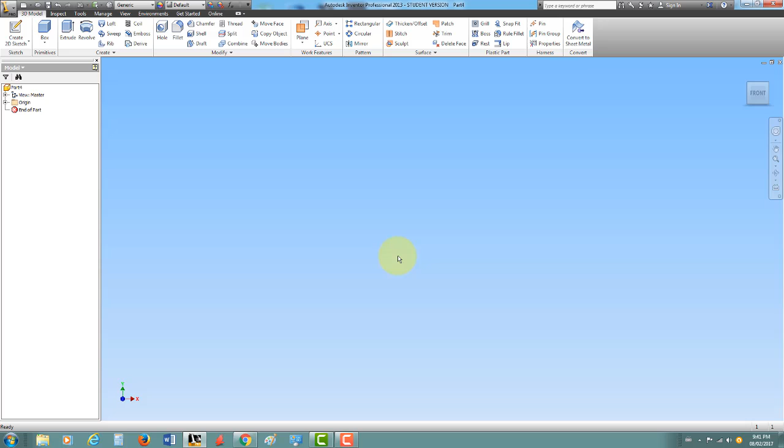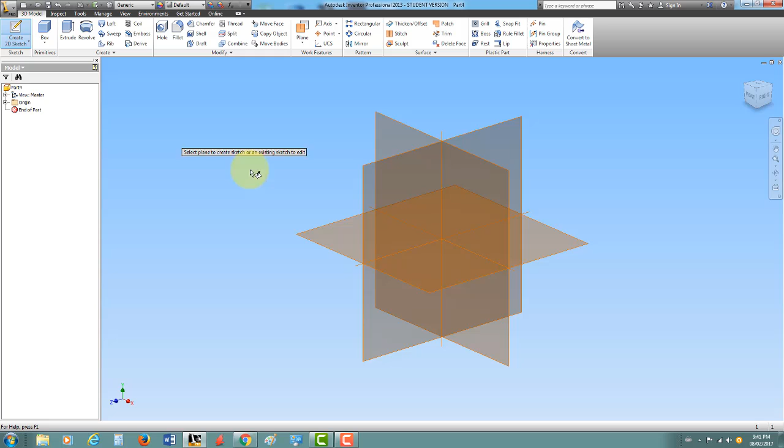Click on Create. Now it creates a 3D space in which we can design our 3D keychain. The first thing we're going to do is create a 2D sketch, and we need to do that in order to make something 3D. Inventor needs a 2D sketch to convert into a 3D object. So we click on Create 2D Sketch, and we're going to select this plane right here.

Now I want to load up my file, the image I just found on Google Images. So I'm going to move my mouse up to, as you can see, Insert, Image. And then I'm going to choose my Spider-Man logo to insert into there.

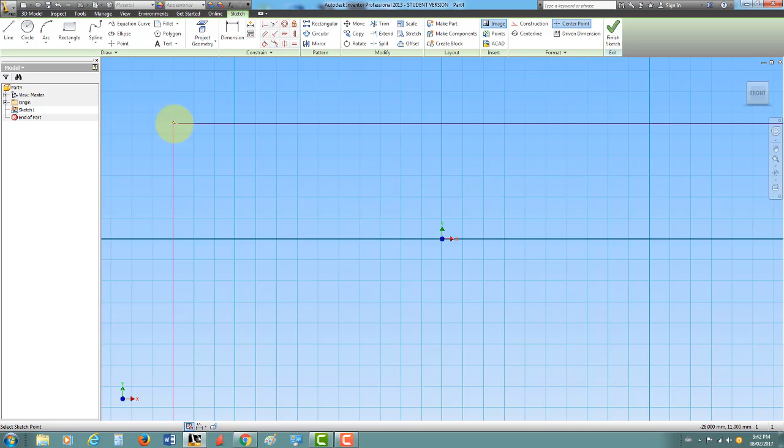And you'll notice that it's going to be really big. And so Inventor's got a cool feature. We all have a mouse wheel. So all you got to do is roll your mouse wheel up or down, and you'll notice that it zooms in or out.

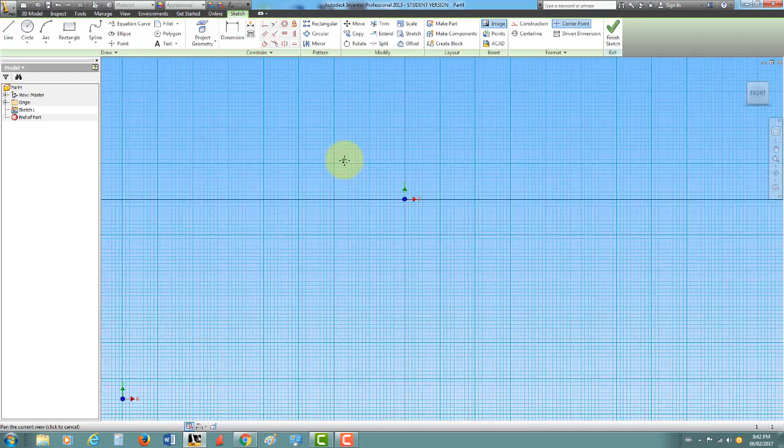The next thing is, you see how we've got this X and Y, these two thick lines and a center? Well, I want to move it so it's actually in the middle. So with that same mouse wheel, I'm going to click with the mouse wheel, and you see a little hand appear, and I'm going to drag. Click, and remember, that's clicking with the mouse wheel. I'll click and place that there. I only want to place it once, and I'm going to hit Escape.

The next thing I'm going to do is dimension this thing, which means I want to set the size of it. Your keychains are going to be very specific in their sizing. And so to make my life a little bit easier, we're going to make sure that our keychains are 70 millimeters across. So that's 7 centimeters.

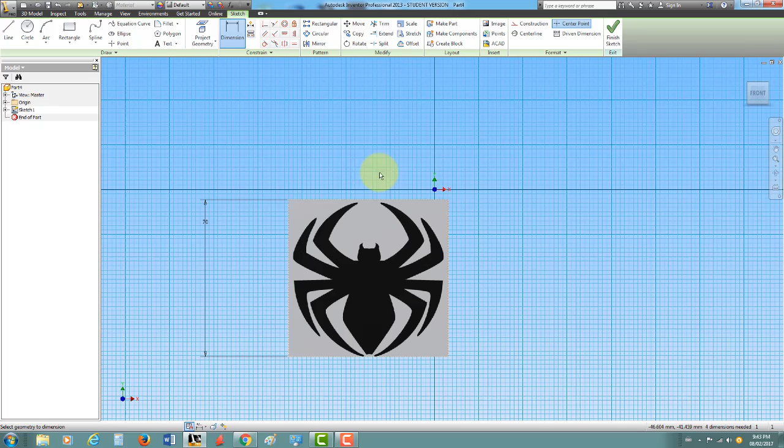So click on dimension. I'm going to choose one side. It does matter. You want to choose the longest side. If it's a square picture, it doesn't matter. If you've got a rectangular picture, you want to choose the longest side, click on it, and change this number to 70 mm and hit enter. It's going to make it a little bit smaller, but that's totally fine. And so now when you make your sketch, it'll be 70 millimeters at most from end to end.

If the picture is white except for a small image in the middle, then talk to me and I'll walk you through what to do in that situation. So you might need to edit the image. So I'm going to click on Finish Sketch, and now I've got my image inserted.

Now I'm going to start another sketch, but first I'm going to name this sketch right here. You see over here it says Sketch 1. I'm going to right click on it. There used to be a rename function, so we might have to do this the old-fashioned way, which is I'm going to click once on it until I see this box open up, hit the delete key, and I'm going to type in image. And that means that my image is on that sketch.

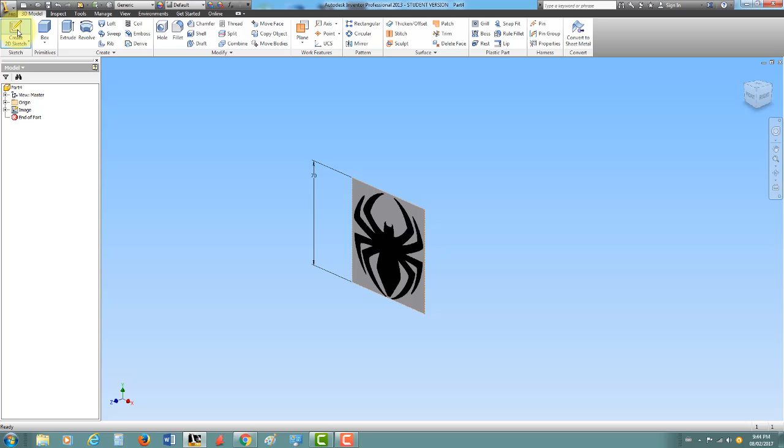I'm going to make another one. Click on Create 2D Sketch. I'm going to click on the very same plane. And now I'm going to zoom in on this, and I'm going to start drawing my lines and tracing this out. Now there's a bunch of tools like arc and circle and spline. What I've found is the easiest thing to do in Inventor is to use the line tool, even for curves, and I'm going to show you how you can do that.

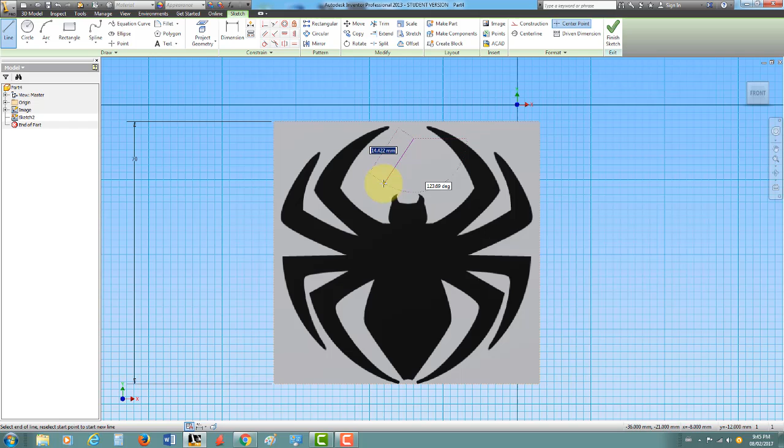So I'm going to click on line, and I'll show you this quickly, even though I can do lines like that, they're all angled. The interesting part is when you draw lines really close together and change them just a little bit, you can create something that looks like a curve that's really a bunch of differently angled lines. So I'm going to click on line again. I'm going to zoom in, and I'm going to choose a spot to start.

Now, some of you might notice you can't quite get your mouse where you want it to go. And that's because there's this function called grid snap that's selected. So if you notice it's doing this weird jumpy thing, move your mouse down here, and you'll see this little magnet with a grid, and it says snap to grid. I'm going to click on that to get rid of it, and look, now I can move it freely.

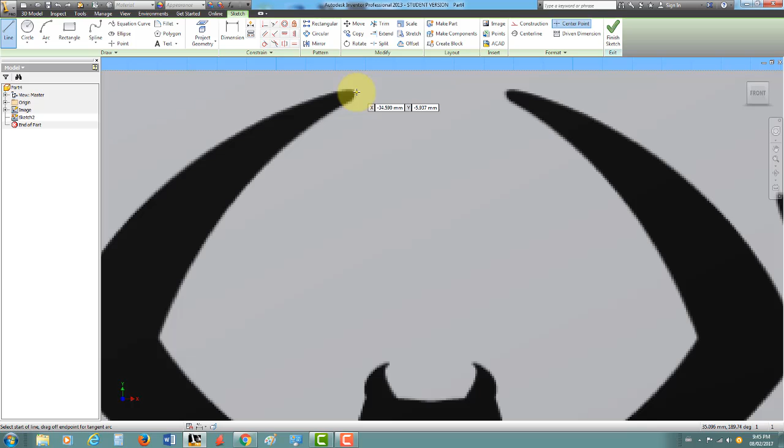So I'm going to start drawing here, and I'm going to zoom in. And if you notice it's kind of getting stuck, like it says so many degrees, just zoom in, draw it in, and just start tracing. You can zoom out, and you can use that middle click to move it over.

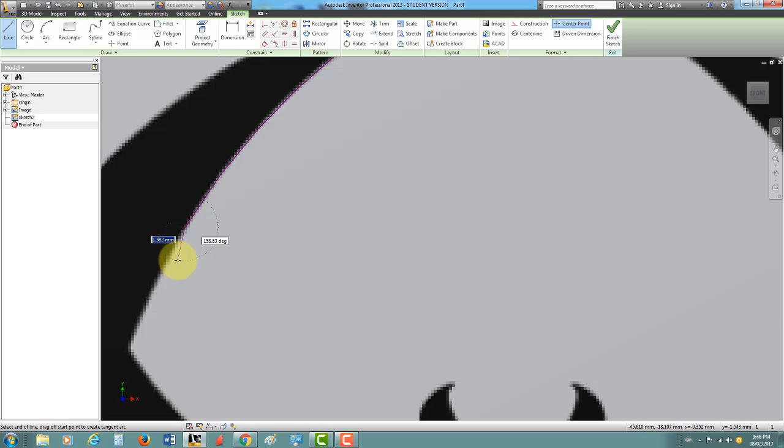And you'll notice what I'm doing is I'm just following the sketch. I'm not doing anything fancy. I'm just drawing a bunch of straight lines, and at some point when the line can no longer trace it, I just stop and click once. Every single time I change the type of line, I just click. In this case I maybe want a little bit finer. Click, click, click, and so on. So let me just finish this up.

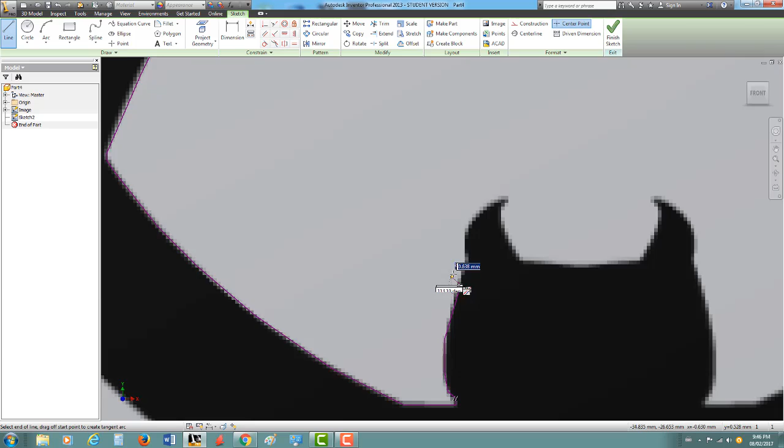We're going to go in fast forward mode right now. So I'm going to stop drawing right here, somewhere in the middle, just where I thought the middle of this drawing was. I'm going to move my mouse here, and you'll notice that in order to stop drawing, I've hit the escape button, and it automatically stopped drawing lines.

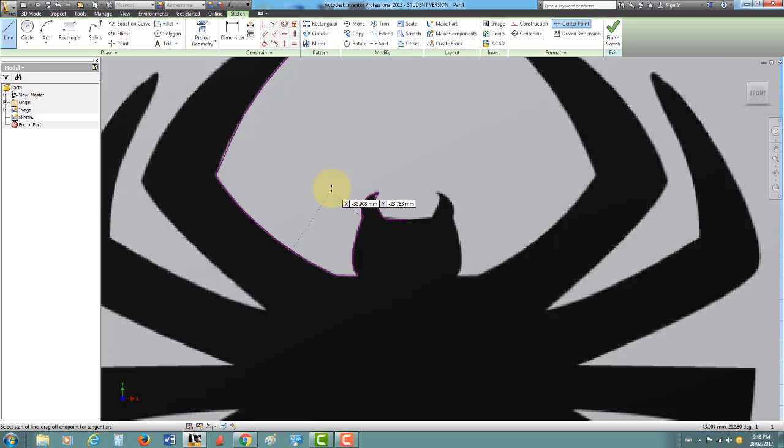Now if I want to continue drawing, let's say I made a mistake there, I can move my mouse up here to the undo button and click undo, and it'll undo any lines I did. If I go too far, I can click redo. So this button right here is undo, and this is redo. If you make a mistake, like going back too far and not wanting that many lines removed, you can just go forward. That's a way of undoing.

Another trick is if you want to delete a line, you can click on it and then right click and choose delete, or - I'm going to undo that - I can click on it and just hit the delete button. So both work, and in some cases one will work but the other won't. So I actually want that line.

Now let's say you accidentally drew a bad line, hit escape, undid it, and want to continue drawing. You just got to take your mouse and move it back until you see a green dot appear. See that green dot? That tells you that you're starting right where you stopped. It's snapping to the corner of the last line you worked on. So the green dot's your friend.

Now the reason I stopped here is because I'm going to do a trick for symmetric drawings, which means the left half is the same as the right half. I'm going to start by drawing a line straight down the middle, and you'll notice it'll automatically guide your straight line. It doesn't have to connect to the bottom, it just has to go straight down. Then hit the escape button.

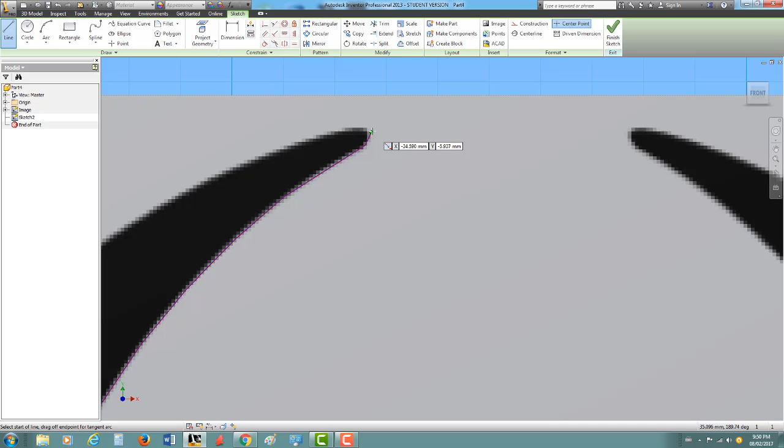The click you heard was me hitting the escape button. I'm going to then trace only this side, until I reach here. So once again, we're going to zoom in on where I last started my drawing, and put this in fast forward mode while I trace this out.

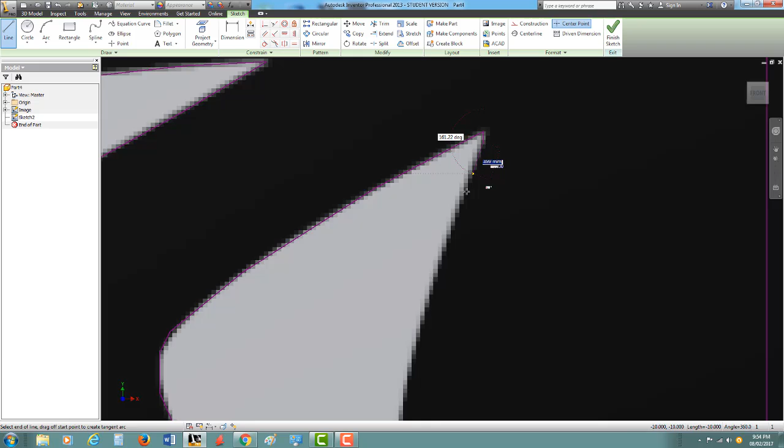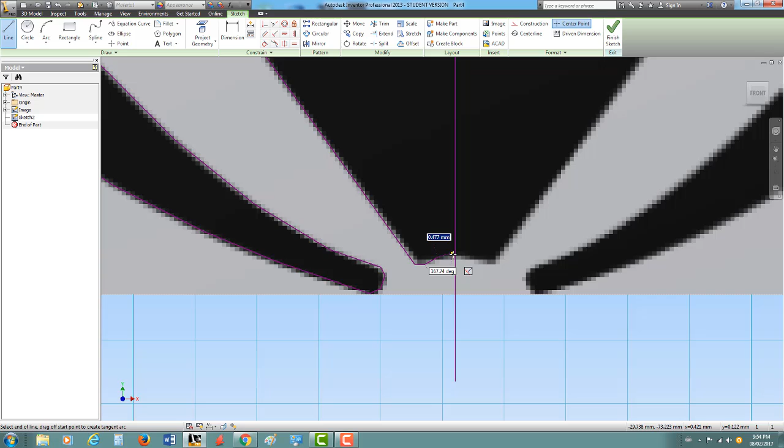Okay, now we're almost done drawing this part right here. So now I've reached the ending, and you're probably wondering how do I know if I've reached the end? Well, if I zoom in, you'll notice that as I move it, all of a sudden it jumps right onto the line. You see how it's on the line? I'm going to make sure that it's actually on the line by going a little bit further past it, and then I'm going to hit the escape button.

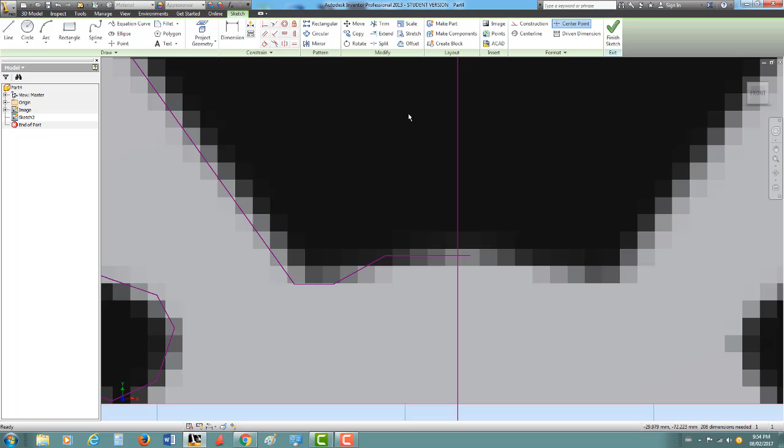And then I'm going to use what's called the trim function, which will get rid of any extra lines. Now, Inventor is very weird - it doesn't like any gaps. So for example, I'm actually going to just delete this. I'm going to show you what I mean - Inventor does not like gaps.

Right now what it wants is what's called a closed shape. So if I start over here and follow the line all the way around, and get down to here, I need to be able to go back to where I started. That's what Inventor wants - it says if I follow the line all the way around, I should be able to get back to where I started.

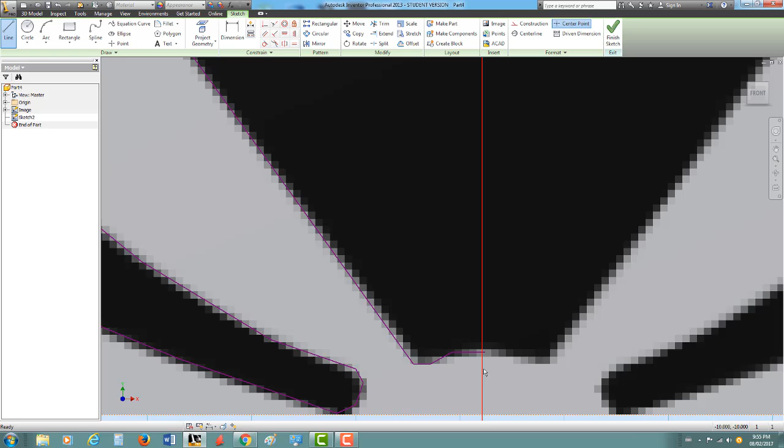You'll notice what happens is I can't. I'll stop here and I have to jump a gap. There's no line leading me there. So in order to do that, I've got to take this line and connect it to this guy right here. And now I can go all the way back around. In Inventor, as long as I've got a closed shape, it'll allow me to make it 3D.

I'll show you this just now. You don't have to do this, please don't do this, just watch this part. I'm going to show you why it matters.

So I'm going to click Finish Sketch. You're not going to click Finish Sketch, you're just going to watch the video. And I'm going to click on the Extrude function, which makes stuff 3D. You'll notice I can't make this 3D, it's just not letting me do it. So I'm going to click Cancel.

Here's a bit of a trick. Let's say I finished my sketch, and this is something you might find useful. Let's say class ends, or you're done working on this and you have to go do something else and want to come back to it. When you open up your file, you're going to see this. Don't just start a new sketch, you want to make sure you go back to your original sketch.

The reason being, think about it this way: if you're making a piece of art, you don't want to draw half of it on one page and half on another, unless you're trying to do some postmodern thing. You want to make sure your sketches are on the same page, so when I look at that one page, I see your full artwork. That's why you have to go back to your original sketch.

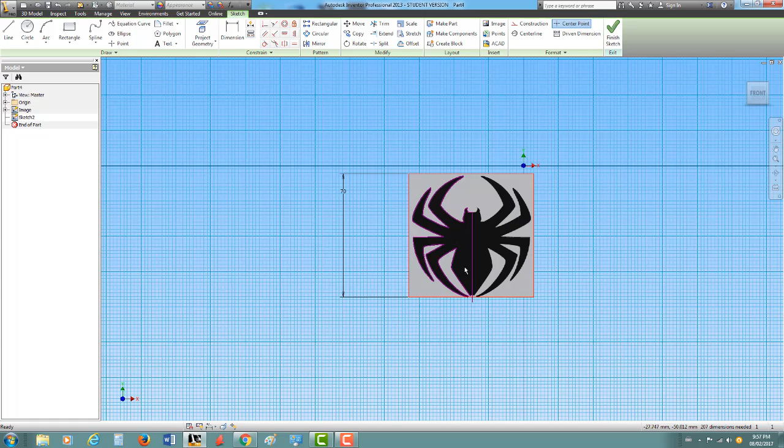So I'm going to double click on the one I was working on. If I move my mouse away and then onto it, it highlights what was last drawn, or what's on there. If I put it here, it'll highlight the image, so image is highlighted, drawing is highlighted. I'm going to double click on the drawing part, and I can go back and work on it where I left off.

The last thing I need to do is connect these lines, and boom. Now I'm going to finish off using something called a trim function, which I mentioned earlier before going off on a tangent. I'm going to click on trim, zoom in, and trim away this extra line I didn't need. Now you'll notice I've got this nice shape, but only half of it.

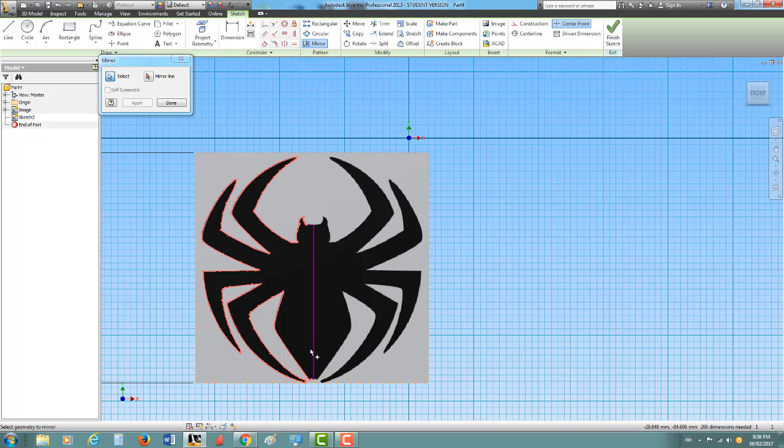So I'm going to use what's called a mirror function to make an exact copy but on the other side. I'm going to move my mouse up to where it says mirror, right above pattern, and draw a box around it, starting from the top corner. I'm trying to select everything but the line I drew that connects the top. So I click that, zoom out to make sure I zoomed in, and I also clicked on this guy right here.

But I'm not going to click on the center line, so I'll click everything but this line down the middle, because that's what's called my mirror line. Now that I've selected what I need, I'm going to click on mirror line, select the center line, and click apply. It's taken my drawing and copied it over pretty closely — not exact, because this line's not exactly in the center.

But it doesn't really matter, it's still going to look great. So I'm going to click on Done. I don't need this mirror line anymore, so I'll click on it and hit delete like we said before. Then I'm going to click Finish Sketch.

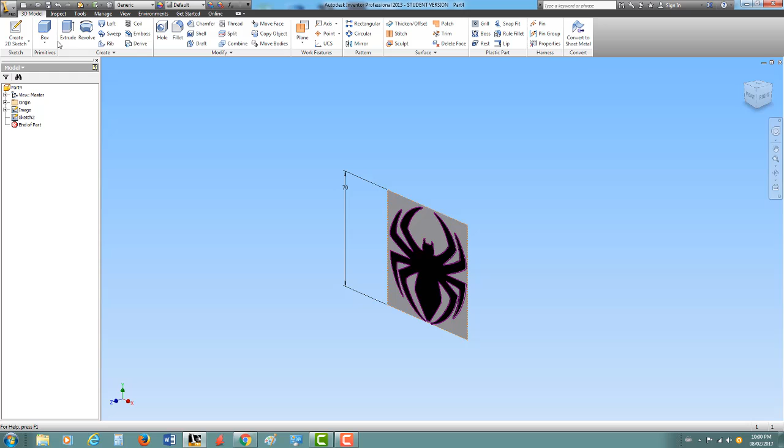Now if everything went well, this is a perfectly closed shape, which means I can go all the way around without reaching any gaps and return to where I started. I'm going to extrude this, and it's going to give you something random — a random number in there. If we make it too thick, it's going to take forever to print, and it'll also look kind of ugly.

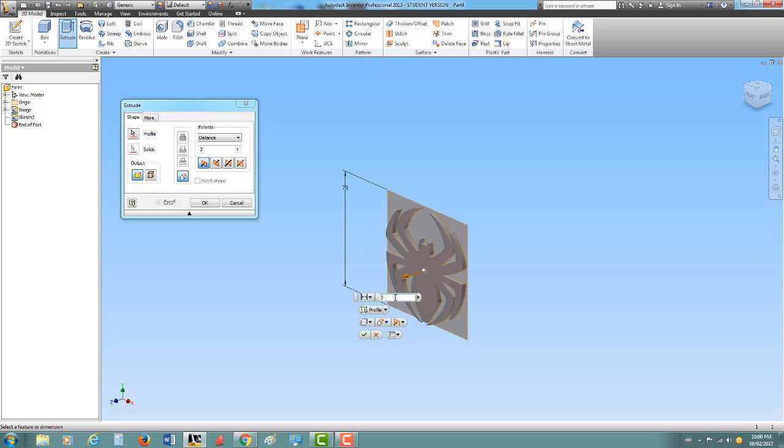This represents 3 millimeters, which is actually pretty decent thickness for your 3D printed keychain. The maximum thickness I'm going for is 6, so 6 millimeters is the maximum thickness that this thing can be. So how do I change this to 6? It'll make it quite a bit thicker.

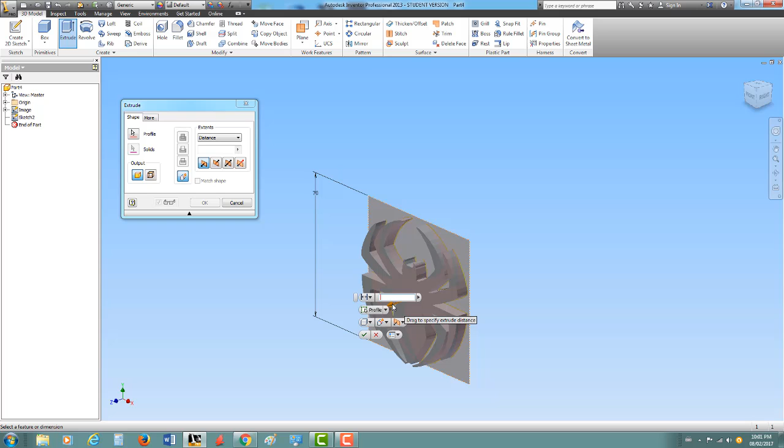Now, you might want a backing, like a little circle behind it, on the back of your shape or your design. If you want that to be the case, make this number 3 — I'm going to show you how to make one. But if you like the way it is and just want the shape, you can make it 6. Okay, so I'm going to make it 3 for now. I'm going to hit the check mark, and you can see my picture.

Or sorry, not my picture, but my keychain in its 3D glory. And I'm going to make the image invisible just so we can see it. So this is what it looks like. It looks pretty nice, actually.

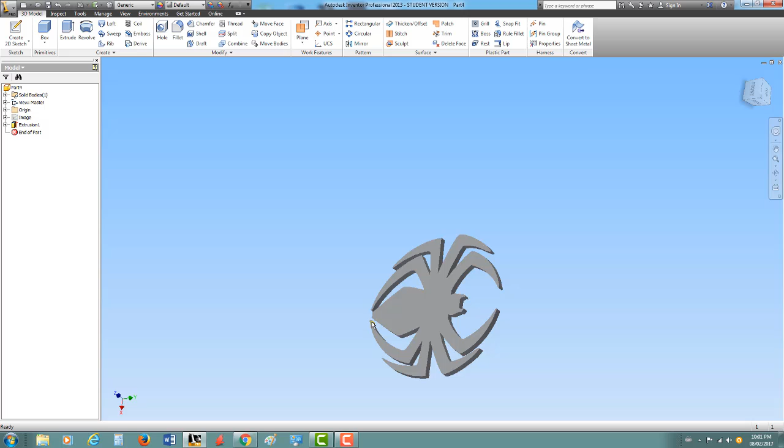Okay, so now one thing I'm doing right here is what's called a rotate function. You can click on this block and just rotate it around to do that, or you can press and hold shift while middle clicking, and these two arrows will appear on your screen where your mouse is, allowing you to rotate. If you want to return back to what it looked like before, you can hit home, the little house icon, and it'll give you a general view of it.

Now, I don't need the image anymore, so if you want to make this image invisible, all you've got to do is right click and go to visibility to make it visible, or right click and click on visibility to make it invisible. So unclick it — see, it's not clicked.

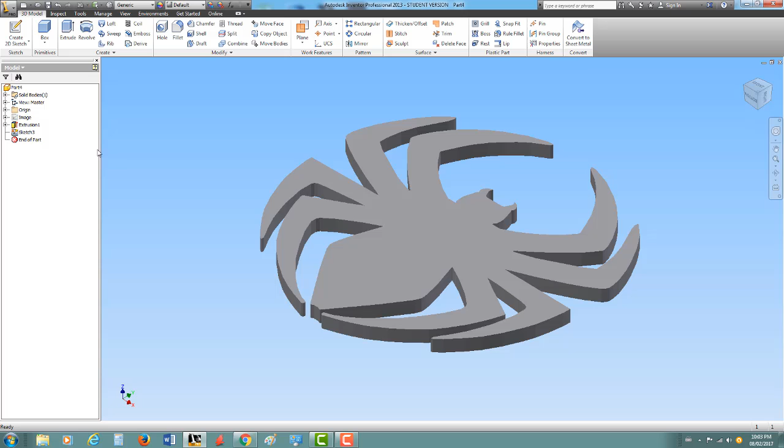So now that I've made my design 3D, I want to move on to add a backing. Remember how I said you can choose to have one or not? I want one on my keychain. So I'm going to take this thing and press shift, and rotate it — or you can use this to rotate it as well — so I can see the back of the design.

I'm going to click on create 2D sketch, and I'm going to select the back of the design. Now the back and the front look very similar, so this doesn't really matter, but there's a reason I want to do it this way.

You're going to click on circle, and you're going to look for what might be the center of your object. It's really tough to figure out where that is, but you're going to have to kind of guess, and I'll show you a way we can move things around. So I'm going to click in the middle there, and then move this until I have a circle that's — as you can see, I didn't quite choose the center, because you can already tell this circle isn't exactly in the middle. Or sorry, my shape, my Spider-Man logo, is not exactly in the middle.

Now it doesn't have to be a circle — it can be a square, a rectangle, whatever you want it to be. So I'm going to try and move this around. What I'm going to do is move the circle using the move function. I'm going to click on move up here.

Once again, I want to select the shape that I'm moving. So, oh whoops, let's click on select. If that doesn't show up, it means this isn't selected — this is the select button not being clicked.

And then I'm going to choose base point — click on this arrow for base point. I'm going to choose the center of the circle, and then move it around until it's in the right spot for what I want. So, kind of a little bit over. I think that's pretty good actually — right there, it's not bad. Maybe I'll try it again and see if I can put it in the proper spot.

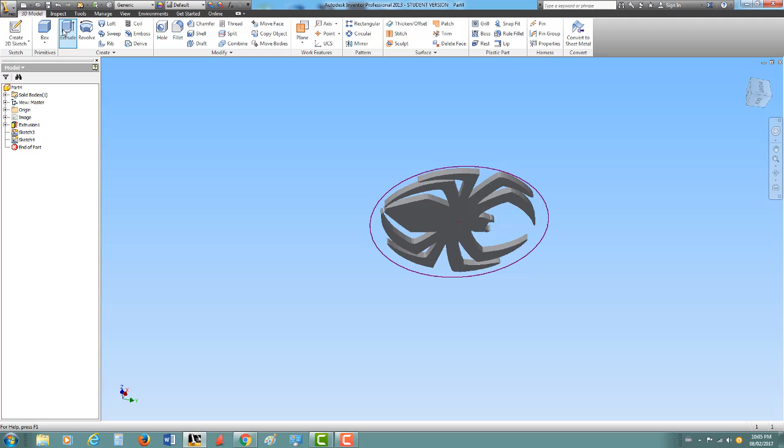I think that's a little bit better. So it doesn't have to be perfect. Just try to do your best for this. Hit Finish Sketch, and then we're going to use the Extrude function. So I'm going to click on Extrude, and you'll notice that Inventor is pretty smart. It said, hey, there's a closed shape there. I know what to do with it.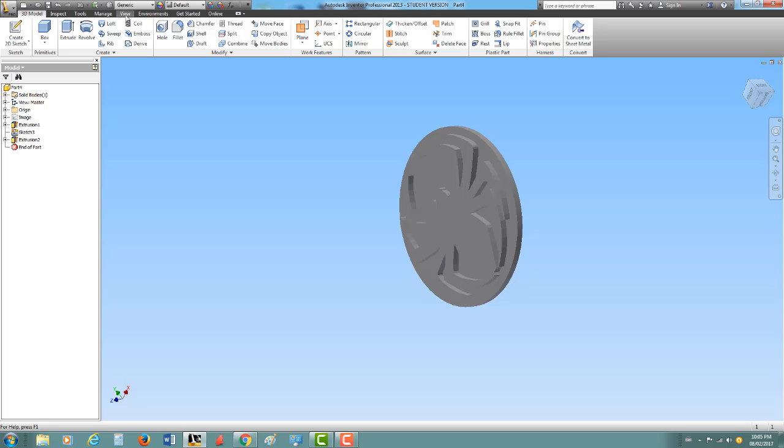Now, as you can see, it's giving me a backing for this thing. And I can hit check mark, and what do you know? Now, you might notice it's really hard to see your design, so just click on View up here, go to Visual Style, and choose Shaded with Edges, and now you can see the edges of your design.

So the last thing I'm going to do is try and make a hole, and then eventually just add some color. Now, the color won't affect how this thing 3D prints, but it's just nice to add some color. To do so, we're going to go and create a 2D sketch. I'm going to click on this surface right here, and we're going to make a circle right here.

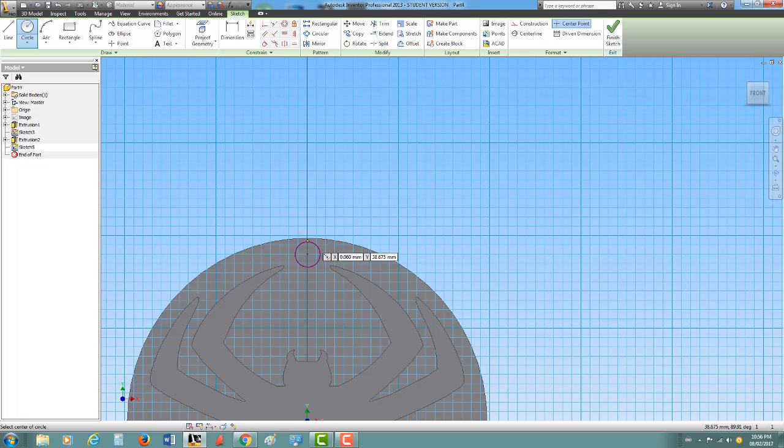Now, you're going to need to make this just a little big, so I'm just going to randomly size it. I want to make the circle here. You can make it anywhere you want, over here, down here, in the middle, whatever you'd like. And I'm going to dimension this so that it's 5 millimeters. I think that should be a good distance.

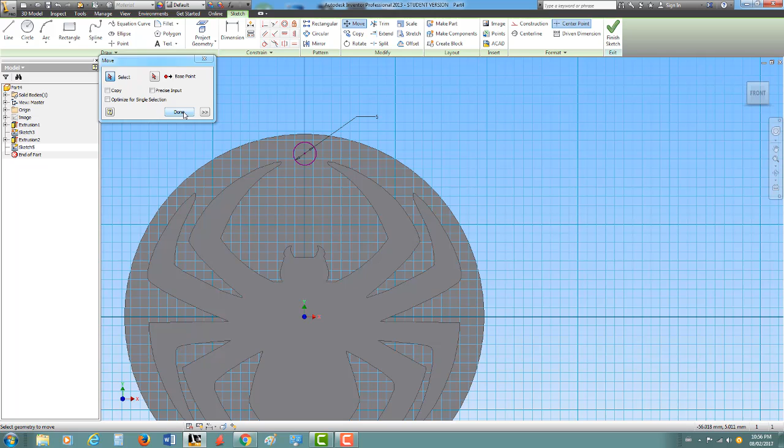The second thing I'm going to do is, let's see if this works, I'm going to click on Move, and I'll move this just a little further away. It's a little bit close. So remember how we did this? We select the outside, center, just move this down a little, and we're good. Click on Done. Then you're going to click on Finish Sketch, choose Extrude, select your circle, and click on Cut.

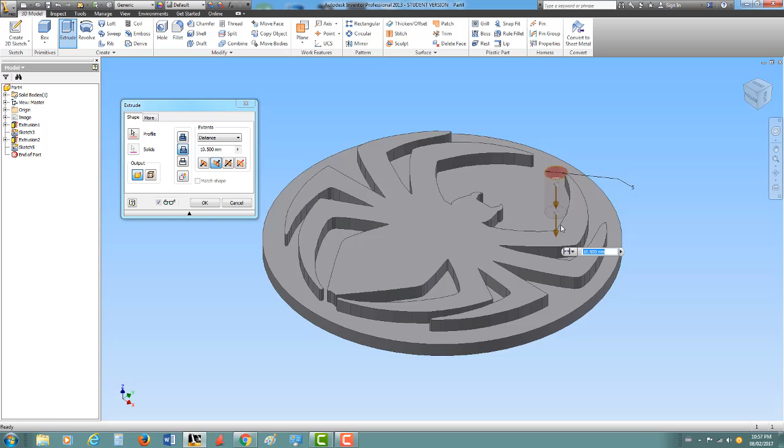And so you'll see you have some options. Usually this is the one that's automatically chosen, but you have to move your mouse and click on Cut, or you can say, oh, I want to go the direction 2, or choose the opposite direction. Or you can pull it up and down until it cuts it through. I'm going to choose my distance as all, and it'll automatically cut all the way through, as you can see. And I'm going to hit OK.

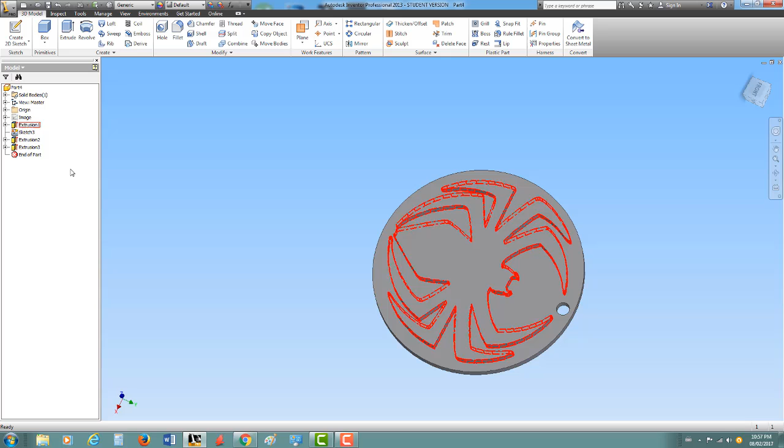Now I've got a nice little keychain hole at the top of my Spider-Man keychain. Now, before I finish this off, I'm going to do something that we should have done a bit earlier. Let's say I've gotten partway through my keychain and I need to quit the program. I'm going to go and click on iPro and click on Save As.

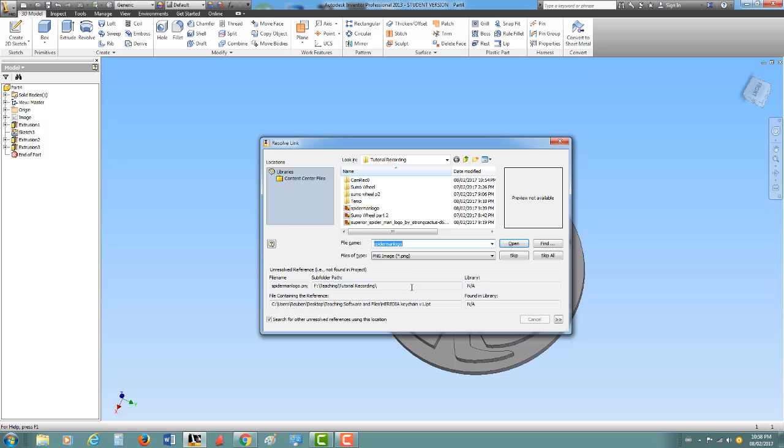And I'm going to save it as, and here's where the key thing comes in, your name, so in my case it's my last name, what you're making, keychain, and which version it is. So if this is the first time you're saving, you want to call it version 1. If you've already worked on it and you came back and opened it up again, you want to call it version 2. Since this is the first time I'm saving, version 1, and I'm going to save it. It'll ask for the Spider-Man thing. If it gives you that message, you can just click on skip.

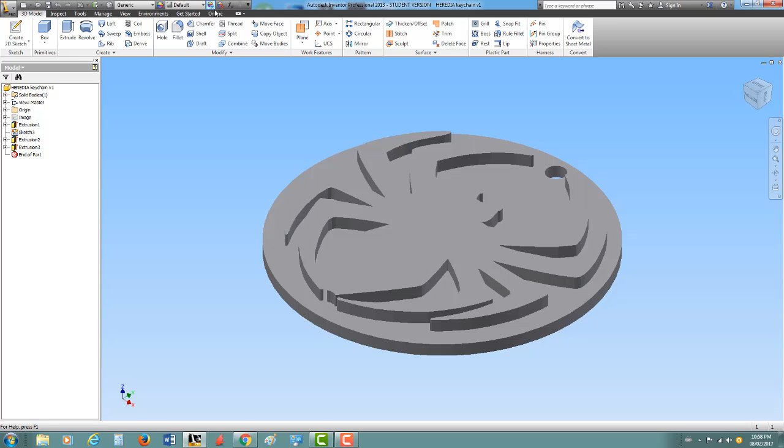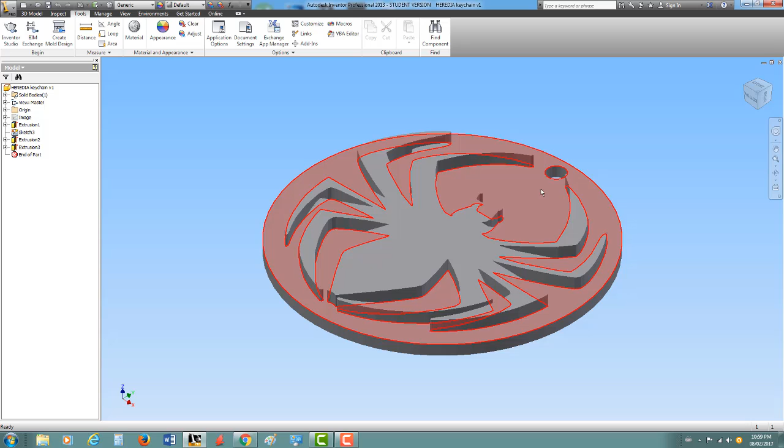The next step we're going to do is color this thing. So the way you do that is you go to Tools, you click on the surface you want to color, and you click on Adjust. And what that'll do is allow you to change what color you want to make it. So I want to make that black. Automatically color that black. Then hit Escape. I'm going to select the backing. Oh, let's try that again. Click on black and then click on check mark to select it.

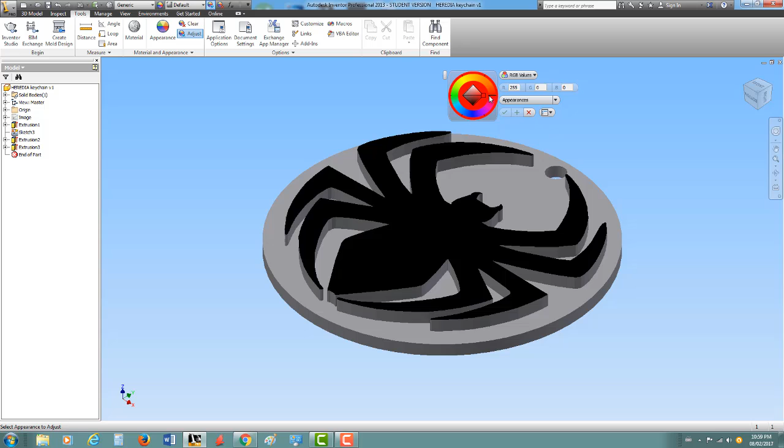The next thing is I can go to Adjust. The backing, I want it to be red. Choose red. Select there. Make that red. And then click on my check mark. Now I've got this cool looking Spider-Man red and black logo thing. You can do the sides as well if you'd like, and make it look really nice.

Since that's my last change, I'm going to quit this tutorial by clicking on my iPro, not clicking on save, clicking on save as, and calling this keychain version 2, or if I'm done, I'm going to call it final. So keychain final. I'm going to save it. Once again, skip that since we no longer need that picture. And voila. And that's it for our keychain tutorial.